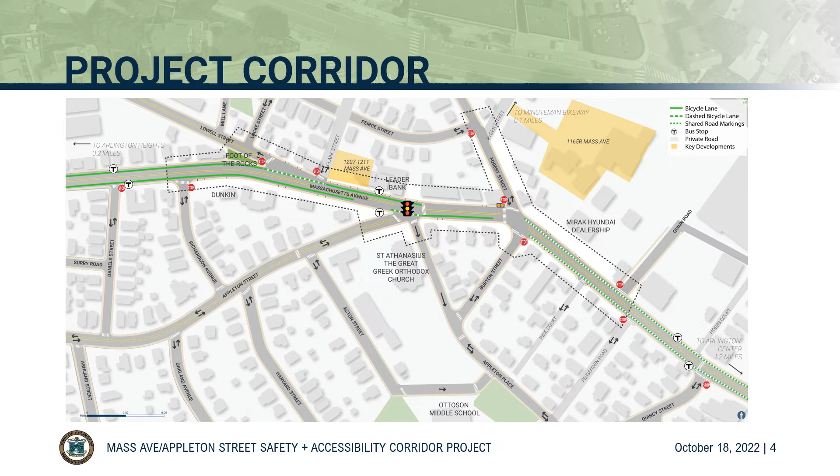The process we've gone through is to come up with something that looks like a final design within a year. We're about 6 months into that process, which started in the middle of the spring. In June, we presented and heard from folks at a public meeting. Then again through the summer, through online forums, surveys, and other input, we used all of that to develop a concept design, which we're presenting to you here today. We're also looking at potential funding sources for the construction of that design.

Based on the feedback we get from the concepts we present, we'll translate those into subsequent design milestones - 25%, 75%, ultimately final design - in a way that can be sent to a contractor to be built, priced, and implemented. I'd say the place we're at now is that things are conceptually engineered. We figure them out at a certain level to show they're feasible, to understand the trade-offs and implications of cost, but we haven't worked out all the final details of exactly how it's going to look and function, or the exact dimensions of every last bit. But we needed to take this pause and share it with folks in the town and other stakeholders to be clear so people understood where we are and where we're going.

This is a more detailed project schedule, which shows where we are here in October, at public meeting number 2, right in the middle of this whole process where we've developed those draft concepts I just discussed. I'd like to finalize these based on feedback and proceed to the next levels of design, ultimately to that bid set. We'll be back at least 2 more times to talk to folks in the community, show them those designs and progress, and how we've listened and adapted the design into something that can be built. Of course, there will continue to be materials available online throughout.

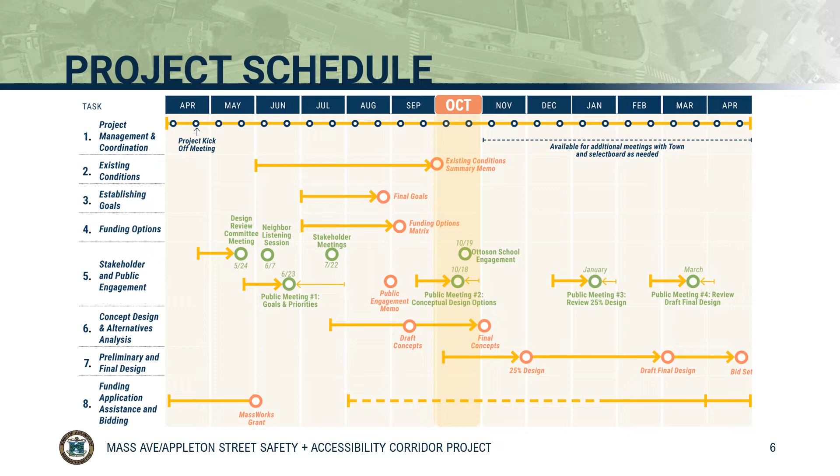With that overview of the process, we'd like to get into what we've heard from you already. The goals of this project are defined by you, the town, and its stakeholders, because those are the things we've been trying to design for.

As I said, we held a public open house on June 23rd at Arlington Town Hall, where we presented and asked for specific and general feedback on the types of things that people wanted to see, things they've liked, things they didn't like, things they've seen in other places and communities that they wanted considered for this area. We brought data on traffic counts, bicycle counts, pedestrian activity, parking, safety issues, crashes, bus activity, and anything else we could capture to understand how the area functions and operates throughout the day.

We've also had online surveys and maps online that people could mark up and provide us with all sorts of input.

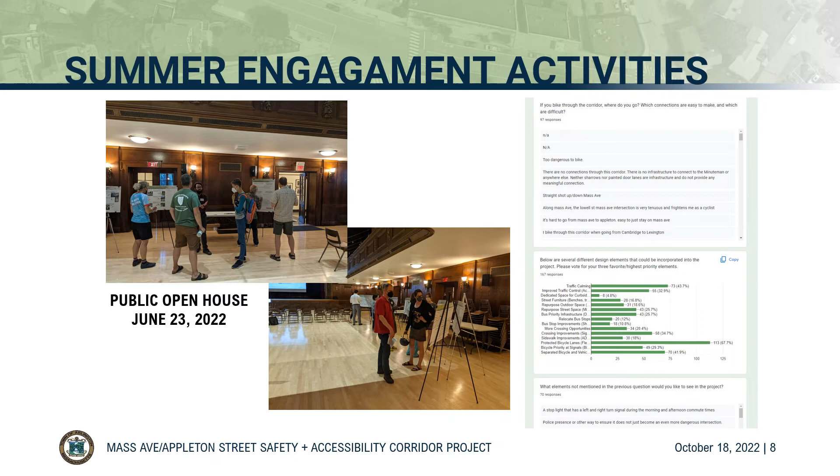We've taken all that feedback and summarized it in materials that are also available online for your view. This slide just shows a few of those comments. They're fairly general, but very representative of the sort of things we heard from folks about things they liked, things they didn't like, things that were important. These aren't every comment we heard, but a good representative sample of that general feedback.

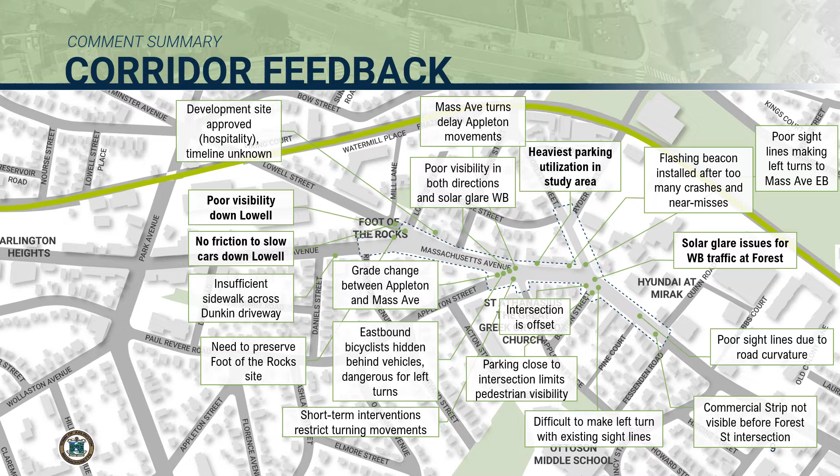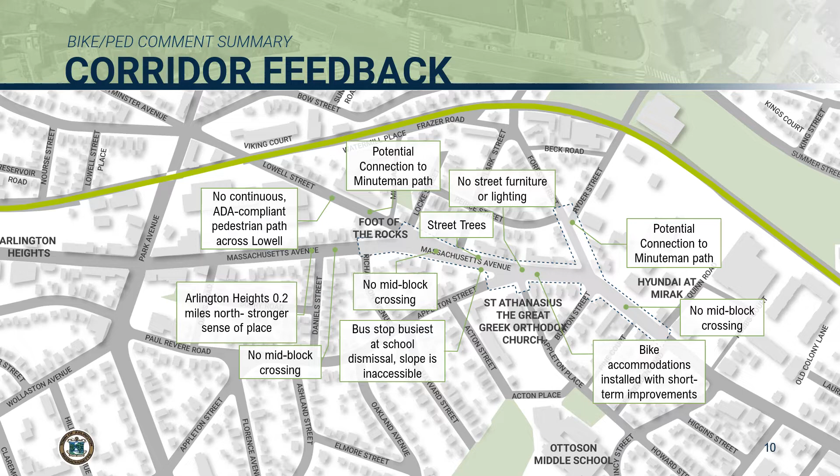On this slide we also made one specific to bicycle and pedestrian feedback. A good portion of the comments we received were directly about this: the need for connections to the Minuteman Bike Trail, mid-block crossings, and items about really making this a place with a certain kind of feel. Again, we tried to incorporate all of this feedback into a concept design.

At that June meeting, we also presented goals derived from Connect Arlington, from other town processes and similar efforts that you and the town and others have been engaged in, and from our own knowledge of what we thought people wanted to see.

We asked you to comment on them, to vote on them, to put dots next to the ones you liked, and to highlight things and cross stuff out. What we've done is taken that feedback and summarized it into something a little tighter and easier to manage and understand.

Essentially, the goals we're showing here represent the viewpoint we took with the town in developing a design: a design shall be successful if it accomplishes these things, to the level it has accomplished these things, which are the goals we care about.

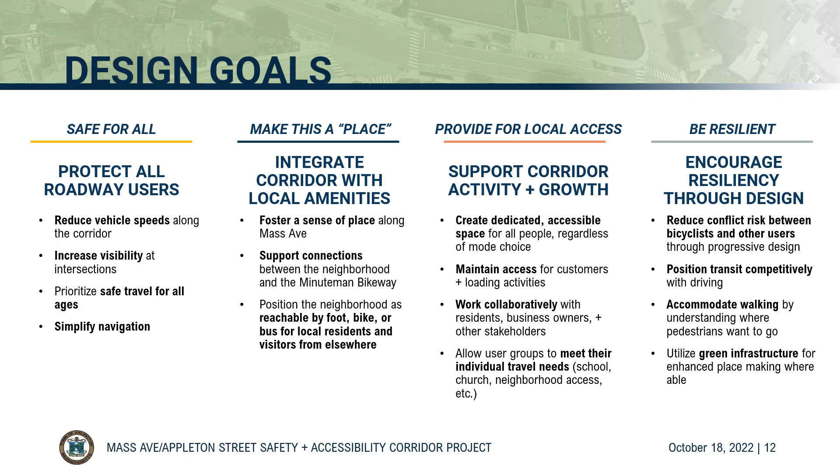Things like making it safe for all, regardless of who you are, to walk through, bike through, or drive through this area. To make this a place with its own identity. To ensure local access for all the people that live, work, shop, play, go to school, church, and all the other things you do right here. And can they do this with this design in a way that feeds into larger sustainability and resilience goals that the town and many others are concerned with.

So with that, let me get into the concept design, which you're not going to be able to fully understand from this presentation. I strongly encourage you to click on the links that show the full design, in a way that allows you to zoom in and out and jump in on any particular element you may be interested in or concerned about. I strongly encourage you to spend time with that.

As we approach the design, we think it's very important to think not only about the goals and what we're trying to achieve, but about some of those challenges from a much broader perspective.

One issue we've observed is that the corridor, at least the study corridor, is sort of disjointed from the broader Massachusetts Avenue experience. You can see from this graphic how it sits at the juxtaposition of a curve, both to the east and the west. As you approach from either direction, where Mass Ave is a lot less treated and more wide open, you enter this curve and now you're greeted with improvements made in a certain kind of area that's much more mixed and multimodal, and you're trying to understand how all of those things work together.

If you're entering at speed and you're not used to this, you don't realize the kind of environment you're entering into. So as we approach the design, a big part of what we're trying to achieve is to announce that this is a different place, both visually and physically, as you approach it from much further back. You'll see this whether driving, riding a bus, on your bike, or otherwise, that straight ahead this place starts to look and feel different, and you will adjust your behavior accordingly.

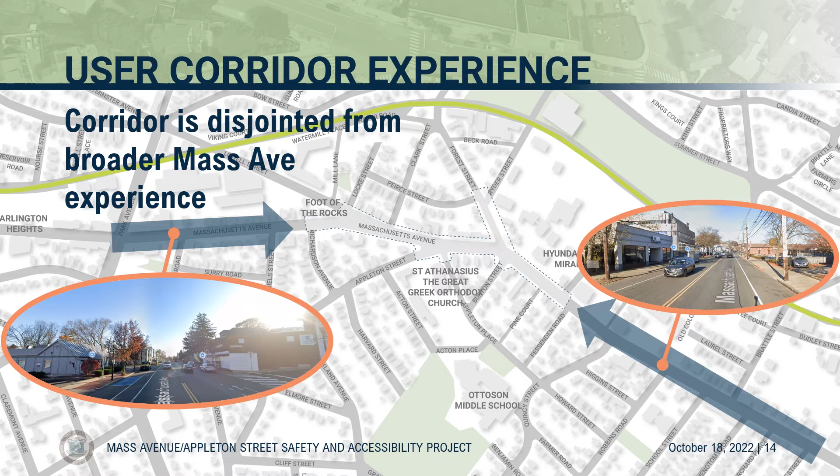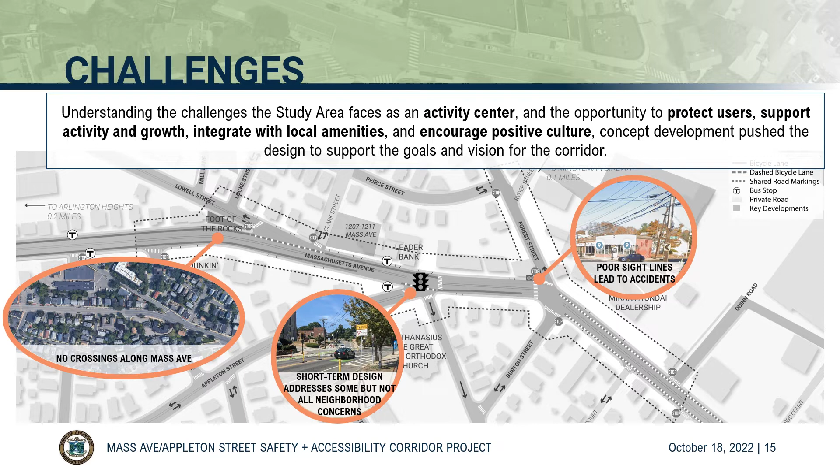Some of the specific challenges in this area have to do with sight lines, visibility, and solar glare. They have to do with how the road lane alignments work in a way that generally allows you to speed through here and not pay attention to other things happening. A successful design must bring all of those factors to bear and enable people to behave in the way that is best and protected for each of them. So we wanted to take all these factors into account in the design and address all of the concerns that folks have.

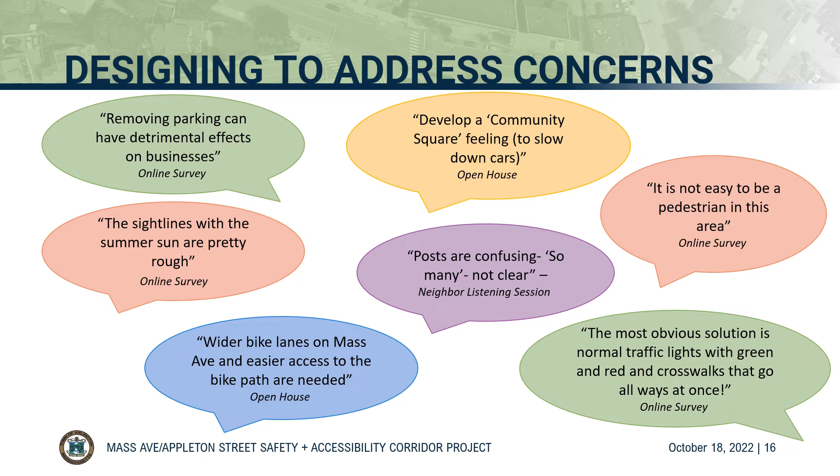Again, this is just another sampling of some of those concerns or specifics from the online survey, neighborhood listening sessions, and the open house. You may recognize many of these statements, you may have made some of them yourself. We think this is a good and representative sampling, and the full set of things that we heard is available online.

This design incorporates dedicated bicycle facilities throughout this stretch, which could be at street level or sidewalk level. We're a little agnostic about the best way to approach that right now and have built in the possibility for either. It tries to preserve as much curbside use as possible, especially in the most important places. It has traffic signals at Appleton Street and at Forest Street at Massachusetts Avenue, along with left turn lanes that allow for safer accommodation. It preserves as much of the character, feel, and operation of the area as we can, while improving the things that have been deficient.

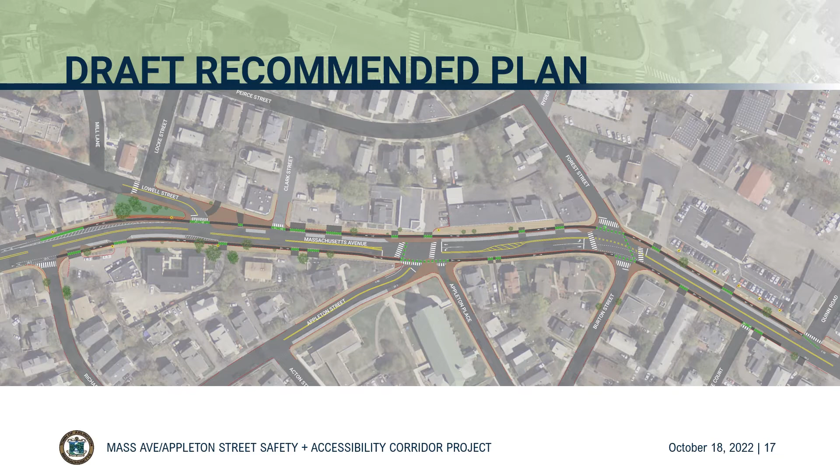Yet there's a ton of detail on this plan. You'll be able to zoom in and out on it. It's hard to read just looking at it at this scale, but we very strongly encourage you to go in and leave your individual comments and questions. We welcome that—we're asking you to do that.

One thing to really note here is that this plan allowed us to accomplish many of the things that have been asked for in the past, including left turn lanes, parking, and bicycle facilities that the current alignment doesn't allow for. We took detailed engineered survey plans of this entire area because ultimately our goal is to reconstruct it. One thing we were able to determine is that the sidewalk on the north side of the street is fairly wide on the public side and includes some additional space in front of the buildings as well. So by reallocating part of that sidewalk to create a separated bicycle facility, it allows us to minimize the amount of trade-offs we have to make.

So by using that, we can retain parking on the north side, create left turn lanes, create dedicated bicycle facilities, and preserve a lot of the existing character while maintaining a fairly wide sidewalk. It's important to think about this. We show options that do not include it, in which case you don't get to incorporate all of the elements I just described. But we think this is a really strong benefit of this recommended approach, and part of what you're able to achieve when you take a much broader, more comprehensive and holistic look at what could be accomplished—and are willing to go after the funding to make it happen.

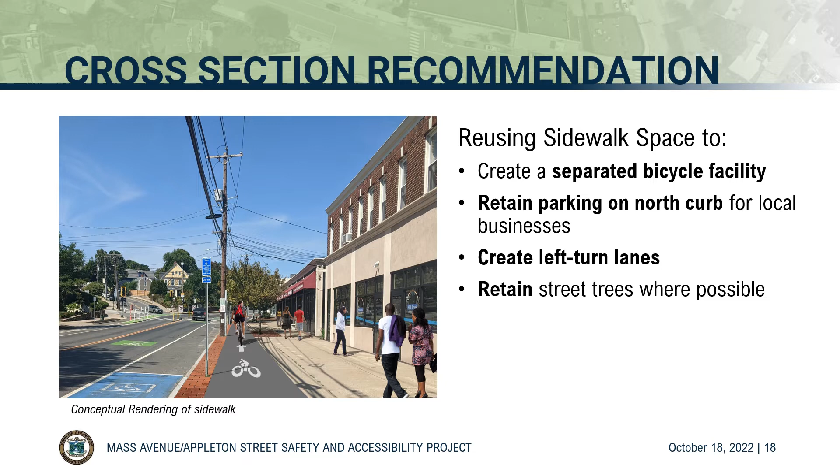Our plan includes signalized intersections, fully operational, protecting all moves at Appleton Street and at Forest Street. It makes the area safer because you minimize conflicts, create pedestrian crossings, and create bicycle crossings.

As an example, we heard from many folks about the difficulties of exiting as a vehicle from Burton Street onto Mass Ave or even across to Forest Street. Today that intersection is wide open, and it can be hard to see to the east and west. You can see the curve on this graphic. If you're coming out of Burton Street, you feel like you have to inch out and take a leap to turn left or right. By having a signal here, that move would come out controlled, with a green light, making it easier, safer, and probably faster to come out at Burton Street.

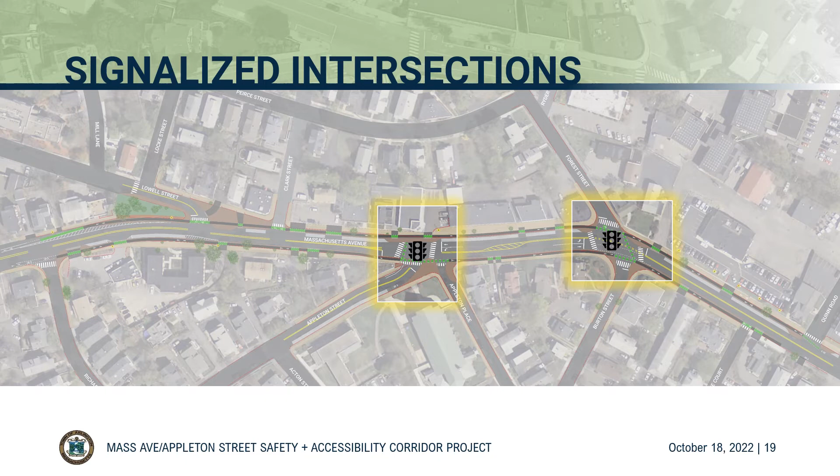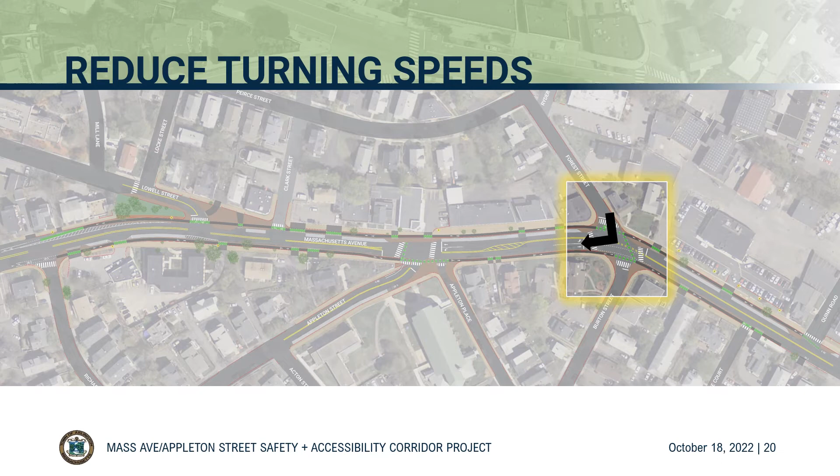We're also bumping out many of the corners, extending those sidewalks. We've concept engineered them enough to know they work for trucks and commercial vehicles, but done in a way that still reduces vehicular turning speed, meaning you'll go slower around these curves, which makes it safer for everybody, especially the students coming from the school who are a big part of the pedestrian environment here.

We're improving sight lines on Mass Ave and approaching it, because we're directing vehicles to be much closer to the double yellow line as opposed to the wider lane they currently have in many of these areas. It improves your visibility as a driver to somebody in a crosswalk, improves your visibility as a pedestrian to see a car, and helps you orient yourself as you're entering this area.

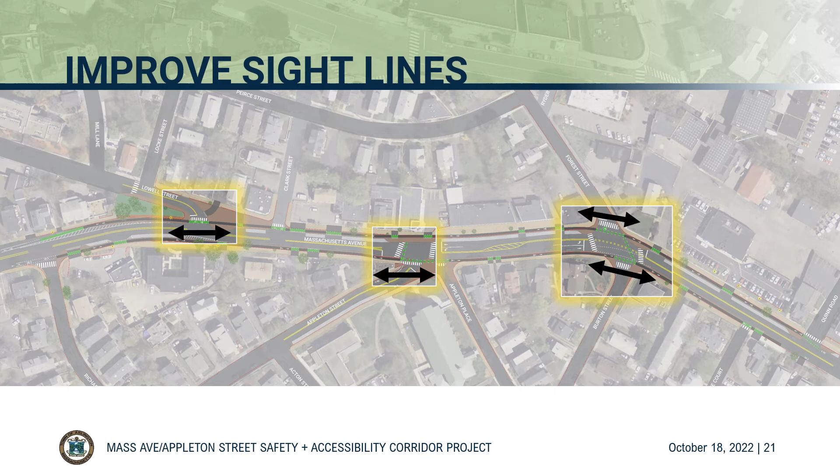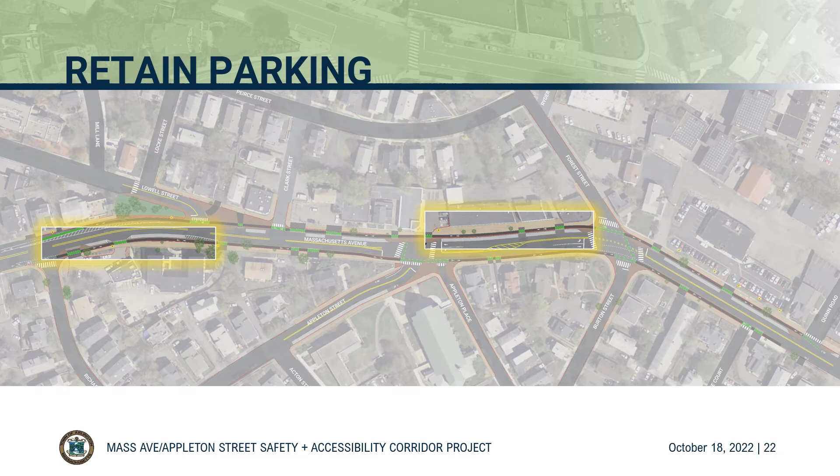We're retaining parking or curbside use in some of the most important places in the plan, in front of the commercial areas, in front of the apartment building, close to Richardson. Anything shown in gray and highlighted is where we think we're able to preserve that curbside use, built from details of a parking analysis the town conducted about where people park and which spaces are most utilized. That's all been incorporated into this recommendation.

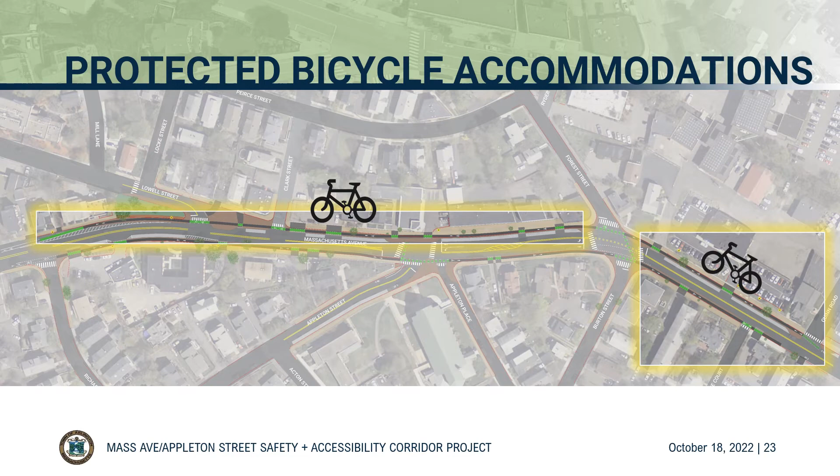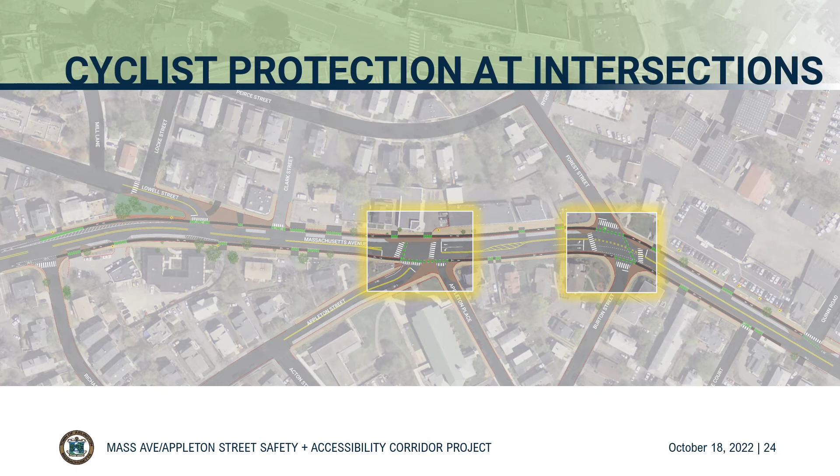We've included protected bicycle accommodations throughout this entire stretch, which feather into either end of Mass Ave with what's already there. These could be at street level or sidewalk level, but either way would be inside of parked vehicles or buffered from travel lanes for as much safety and protection as possible. That includes at intersections, where you'll have left turn lanes or crossing pieces for bicyclists, shown in green. You might also have bicycle indications at the signals along with pedestrian indications, perhaps similar to what exists in the town center.

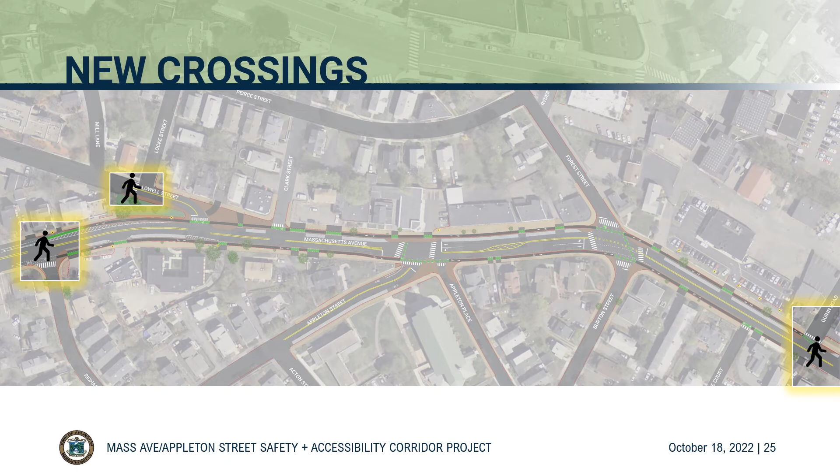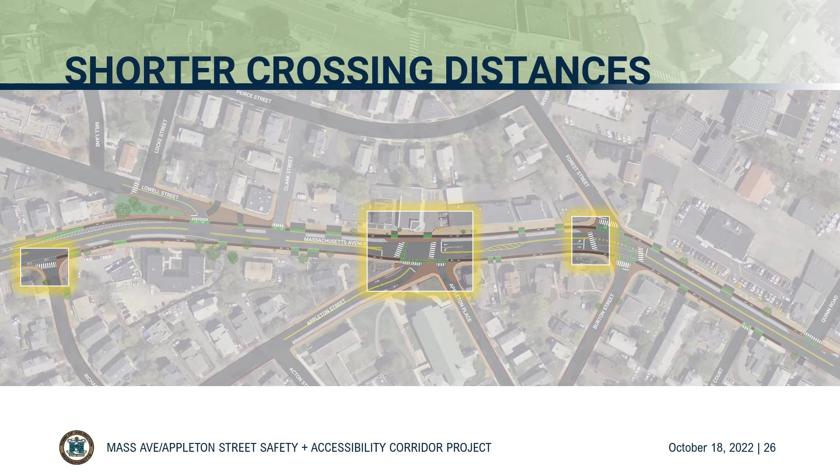There'll be new pedestrian crossings. We're showing a few, and we may be able to add more. You're welcome to recommend additional places where we may want to see those as part of this design. Both the existing and proposed crossings will be shorter, so you'll cross less pavement from one side to the other because we're bumping some of those curbs out, especially at the main Appleton Street, Appleton Place intersection.

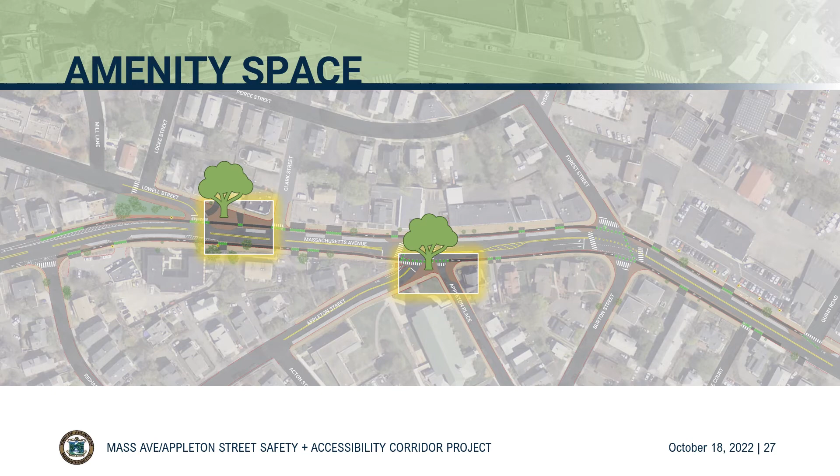The areas highlighted in brown are potential amenity spaces, plazas, things that can be landscaped or treated or have other features like street furniture. We can make them pretty, add special elements, and celebrate the local character. We haven't done that yet because we still want to make sure folks are in agreement on where they are, how big they are, and what they look like. But we've been working with our team to know these are substantive spaces that something can be done with.

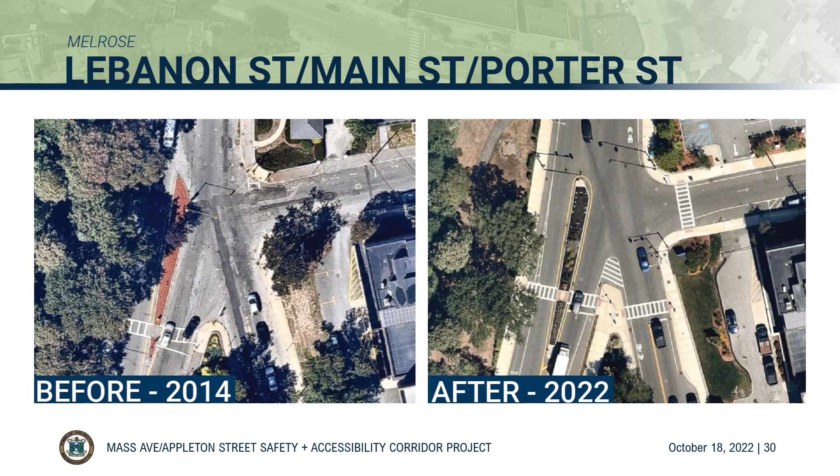In downtown Melrose, or just north of it, at Lebanon Street and Porter Street, you can see another place where a wide expanse of pavement has been treated and channelized in a way that improves the pedestrian, bicycle, and vehicular environment. There are countless other examples where other communities have done this. We strongly encourage you, if you can think of others or things you've seen elsewhere that you want included here, please share those comments with us.

This is the point in the meeting where we'd normally ask people to go back to the room, pay attention to the board, and mark up the maps. We're asking you to do that virtually. Everything available at the meeting is also available online. It's all clickable, not editable - you can't change it, but you can write notes, comment on other people's notes, make marks, and ask questions. We'll do our best to address all of those as we move to the next round.

As I said earlier, the concept we discussed and I presented is our recommended concept. We know there are other ways to achieve similar things. So on the board, when you click on it, you'll see a number of alternatives, both for how Appleton Place is treated and for the cross-section between Appleton Street and Forest Street.

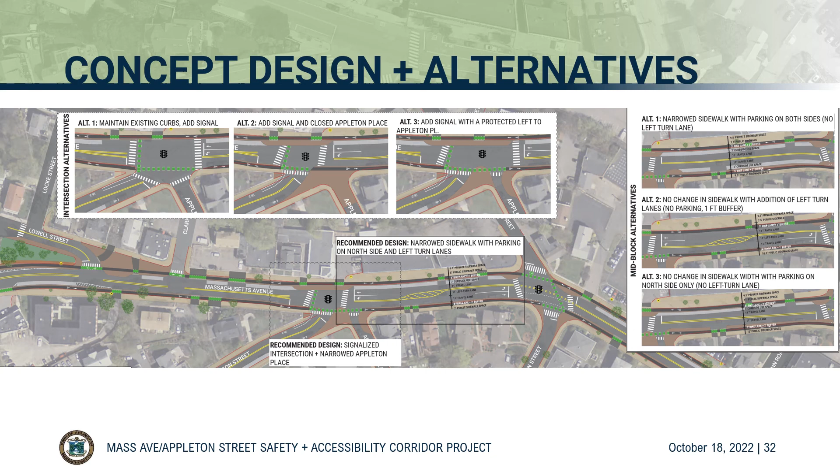So as I said, we encourage you to spend some time to think about all of these, to look at them, to ask questions, to click on the other links, and make sure you spend time with this. Tell us what you like, tell us what you don't like, tell us what would be helpful if you need more information. You should be able to not just add comments, but see comments other people have made and add comments on top of those.

This period will be open for a little while, probably through the beginning of November, a couple of weeks at least. I don't think we've fully determined the close date, but assume within the next few weeks we're going to have to move on and take all those comments and do something about them.

We need to progress the design - refine this concept to 25% design so we can hit our overall schedule and meet those grant funding requirement deadlines. We'll be back to you for at least a couple more meetings in the winter and spring, as well as continue to post information online.

Going back to the overall schedule, we're going to move from this design to something more refined that we can take to a 25% level, aligning this with those funding opportunities and answering all the questions we'll need to answer from any funding authorities. We'll be back publicly, probably in the winter, to share again with folks online and hopefully in person, and answer more questions and show our progress.